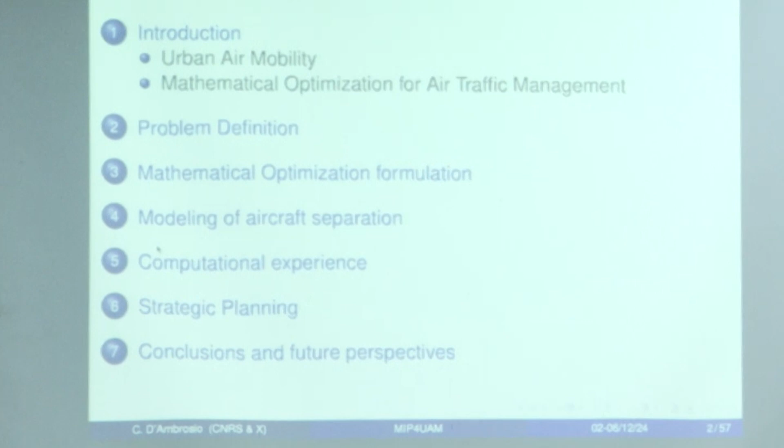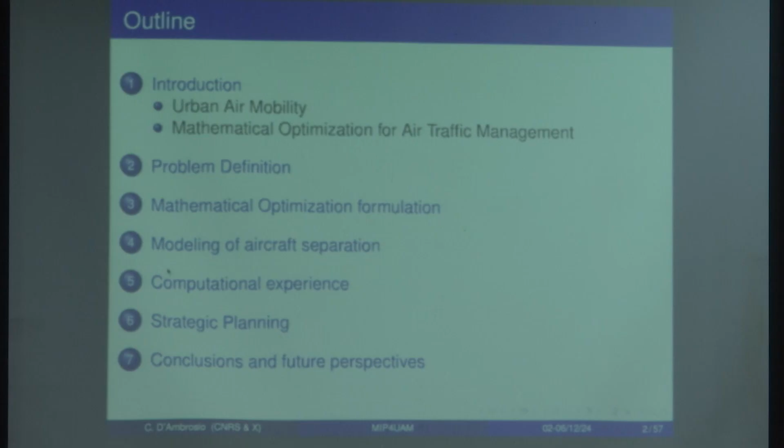So the outline of the talk today is this one. I will start by introducing urban air mobility and what I mean with this. Then I will speak about how mathematical optimization can contribute in urban air mobility and guarantee safety in particular. I will focus on this aspect. Then I will go through a more formal definition of the problem, and I will focus on the most interesting part for me of the modeling of the problem, that is the safety constraints and how we decided to model them. Then I will show you some computational experience, and if I have time, I will speak about some ongoing work. So feel free to stop me anytime for questions if something is not clear.

So what is urban air mobility? I guess all of us know that in widespread cities we have a problem of ground traffic, congestion in particular. There have been several approaches to try to tackle it. In particular, urban air mobility is thinking about using the third dimension, the sky, in order to decongest the traffic a little bit. This, of course, is already present in some cities. For example, in São Paulo, there are people who are using helicopters to move around. But the difference is that it will be like an air taxi that will be available in general, and we want it to be sustainable.

So the idea is that there will be this in cities. Here I put New York and Paris. These are the cities in which the discussion for proposing this service is more advanced. They're still working, and they've been doing some test flights for at least one year in Paris and New York. I looked it up about India, and apparently there are discussions in India as well to propose this service, but they are less advanced than in other cities.

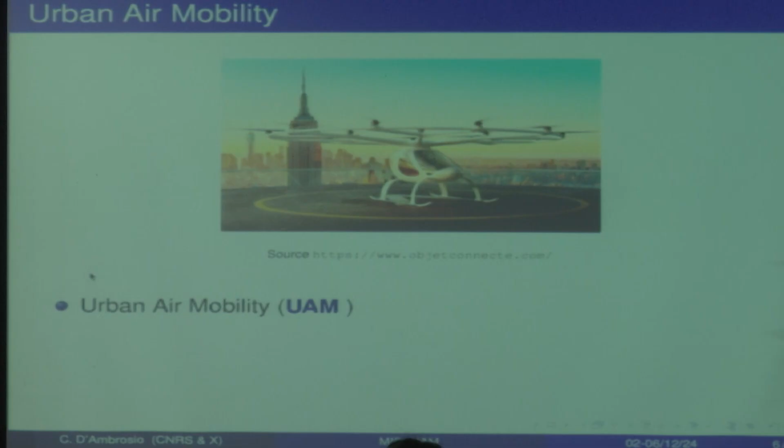So what is the idea, and what is this vehicle here? It looks like a helicopter, but it's not a helicopter. It's called an eVTOL, which stands for Electric Vertical Takeoff and Landing vehicle. It takes off and lands vertically like a helicopter, so the advantage is that it doesn't need a lot of space to take off and land, as opposed to aircraft. It's completely electric, and in the cruise phase it's pretty efficient. There are propellers that are made for takeoff and landing, and others that are for cruising.

The idea is to integrate this service into the public transportation offer as an alternative to taxis. At the beginning, there will be only a few of them, and maybe expensive, but in the long run there will be shared taxis, etc. So the cost will be sustainable, not very far from a taxi, let's say. So that is the idea.

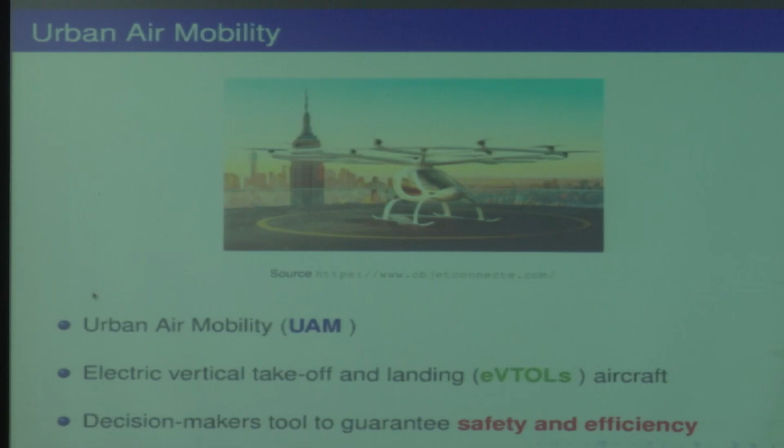However, the point is that we have to integrate it in the system, and there are several questions that are still open. First of all, infrastructure: how to make infrastructure available. You can use heliports, but we will need to install new ones, which we will call vertiports. Also, as they are electric, they have to be connected to the grid and provided electricity, etc. But the focus of today's talk is safety. We need to guarantee that we propose a schedule of these vehicles so that they do not crash, of course. And optimization tools can be used to help this traffic control.

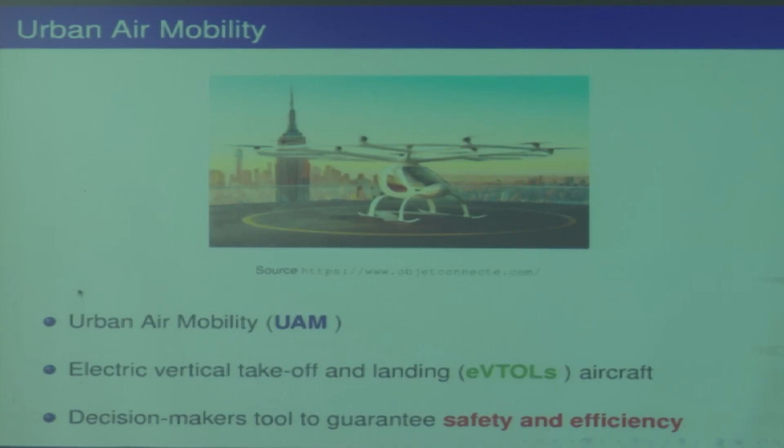So I don't know if you see, but it doesn't matter because I will explain. So there are mainly three phases in air traffic control. This is valid also for civil aviation, actually. The green part is the so-called strategic phase, in which the planning and scheduling of the flights is done in advance. Then there is the second part, in yellow here.

So it's after departure time. It is the tactical deconfliction, where we suppose that some disruption might happen, and then we need to re-optimize in order to make the schedule that became infeasible feasible. And then there is the red part, detect and avoid, where the pilot decides. So we're really about to crash, and they need to decide what to do.

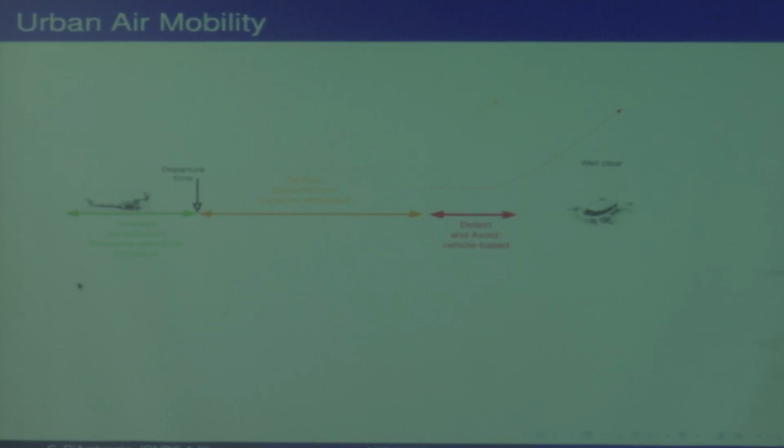We need to try to fix the situation before we arrive at the red part, because in the red part mathematical optimization cannot do anything anymore. So we will focus on the first two parts. In particular, I will actually start with the tactical deconfliction. We have a conference paper on this part, and this is the ongoing work. This other paper is more on the re-optimization part, the tactical deconfliction. I will start with this because we use this problem as a sub-problem of this one.

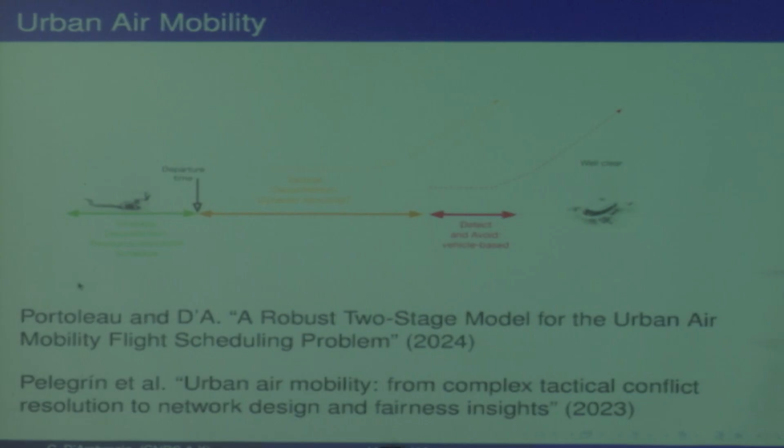And the idea for the strategic deconfliction will be to have a robust solution, which is robust to the disruption that we will see here. Okay, so far so good? Yeah.

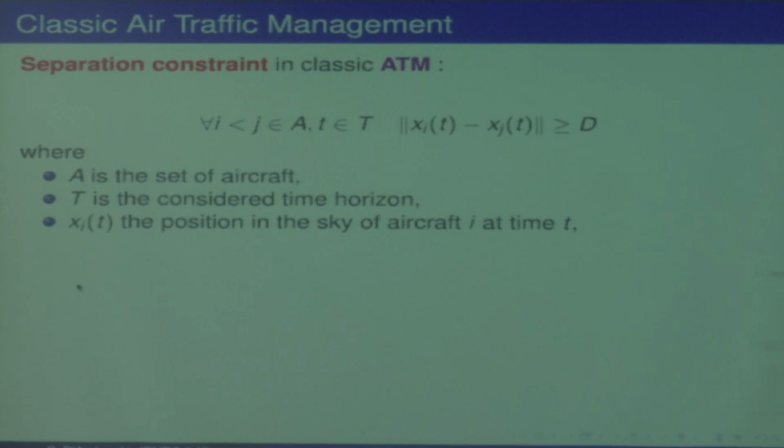Okay, so now mathematical optimization. Let's start with some formulas. I will start with what we ideally would like to have, which is guaranteeing safety, given by these constraints. Capital A is the set of aircraft. So for each pair of aircraft, and for each instant in the time horizon, capital T, x_i(t) is the position in the sky of aircraft i at time t, and we would like the distance between i and j to be at least capital D,

that is our safety distance. Unfortunately, this constraint has several aspects that make it complicated. First of all, this is usually a Euclidean distance, so it's a nonlinear, non-convex constraint. Second, t cannot be sampled and discretized; we need to consider every instant in order to guarantee safety. So we have non-convex constraints, actually an infinite amount of them. We don't want such a difficult problem in the re-optimization phase, so we will see how to specialize and simplify this constraint in the urban air mobility situation.

Infinite amount of them, because of what? T. Yeah. And unfortunately, if you discretize, you don't know how to discretize it, because between two samples there might be an infeasibility, right?

Okay, so what is the idea? I have flight 1 in red and flight 2 in blue. At time 0, they are in this position. They need to take off, and their trajectories are fixed, this and this. If they take off at the same time with the same speed, they will find themselves in the same position at time 5, and of course there will be a crash. So we want to avoid this.

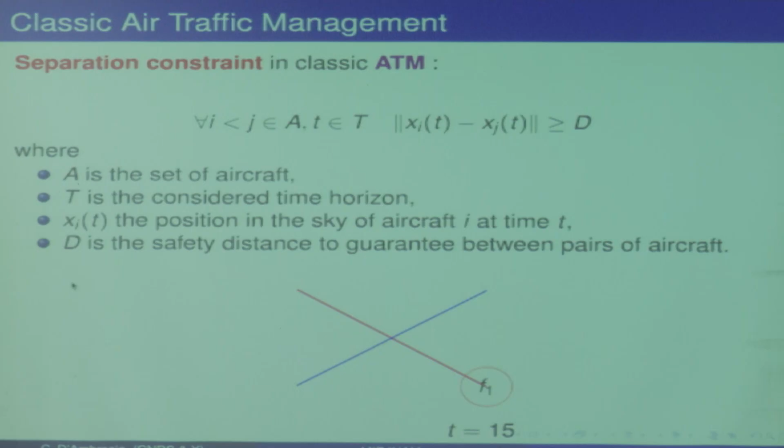So what could be a potential solution? We ask F2 to leave at 0, but F1 to wait, so that when F2 is here, F1 can go here safely. And then F1 will just arrive a little bit later to the destination. Okay? Clear? Yeah, okay.

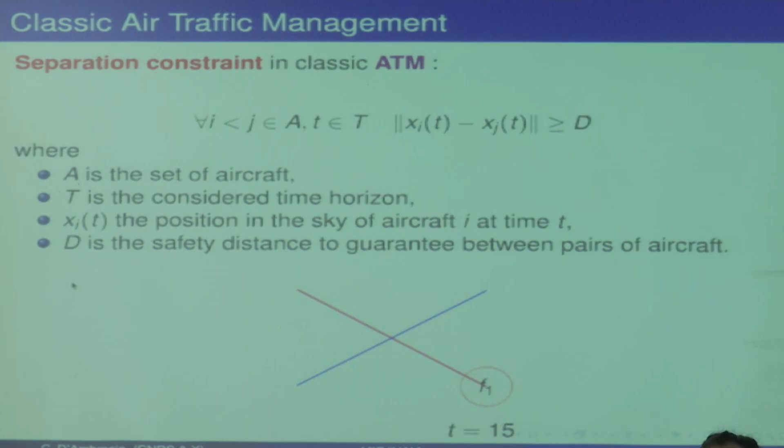What about vertical separation? Oh, vertical separation, that is a good point. Even in classic air traffic management, you consider only the flights flying at the same altitude. So you can consider a 2D problem, and you do not want them to change altitude during the cruise.

But shouldn't the assigning of altitudes be done at the same time? Say again? Shouldn't you be choosing the altitude and the departure time simultaneously? That can be done. So basically, the decision on the altitude is made at takeoff; takeoff is the only place in which you change altitude. And in our modeling, we can deal with it by splitting the different corridors and assigning them to different aircraft. Does it answer it? Yeah.

So this is how it will work in the US. There will be a corridor, so some given altitudes that are devoted to this service. And they define some kind of roads in the sky, virtual roads in the sky, and the vehicles cannot really get out of it. So they cannot change altitude in the cruise phase, and they just have to follow the road, and that's it. So that is how it's organized.

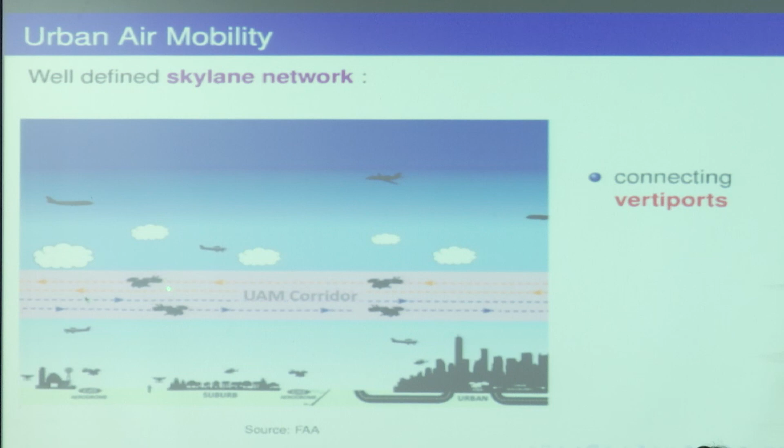And so basically, for each of the roads, there is a direction, and they have to keep it. They cannot overtake each other. So it's very regulated. And so the idea is that we want to decide... I mean, actually, our only decision is really the scheduling of the flights, because they cannot change path online, basically.

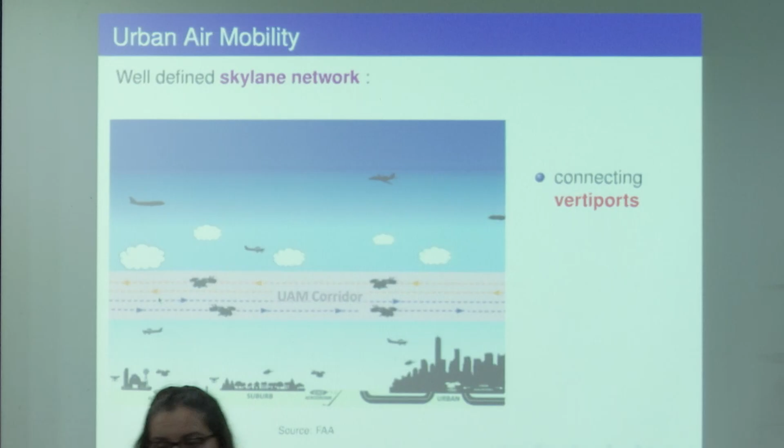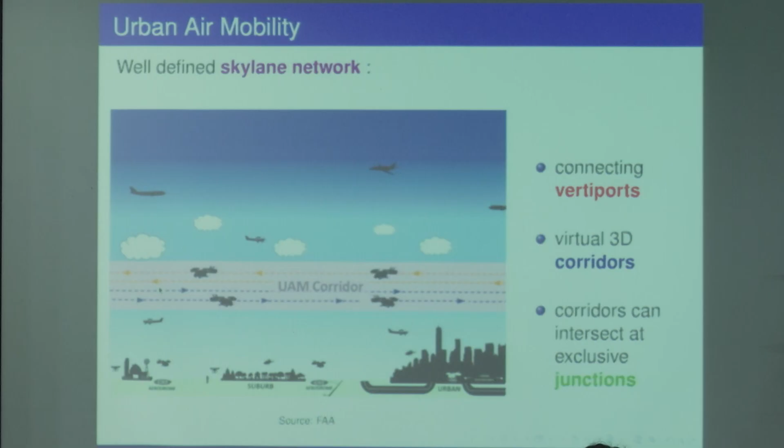And so the safe scheduling for F2 was: we leave from X2 at 0, then we arrive at X3 at 5, and we arrive at X5 at 10. And for F1, we leave X1 at 5, we arrive at X3 at 10, and we arrive at X4 at 15. And so finally, our constraint that will allow safety is that we need F1 to arrive at this common point after the time at which F2 arrived at this point, plus a kind of safety time that I will define more formally later. Okay, is the problem clear? Okay.

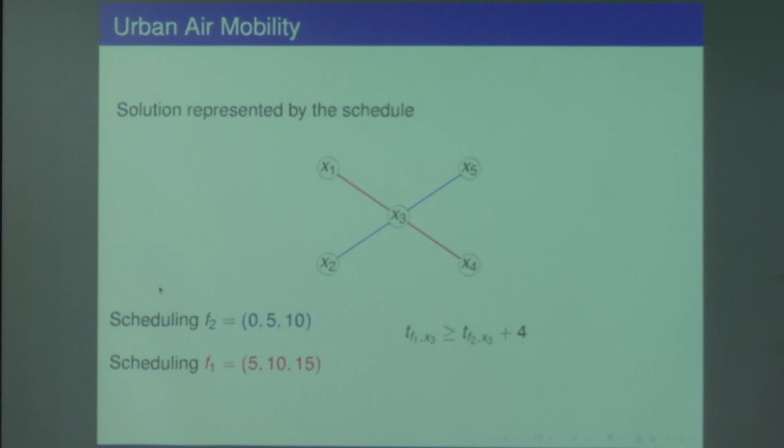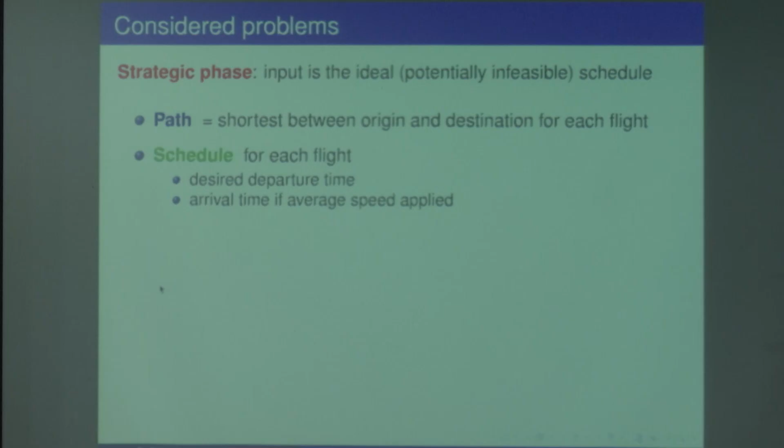However, we will focus on the tactical phase, in which we have a nominal planning which is not feasible anymore because of some disruption. And we decided to consider three types of disruptions. One is just a delay. The second one is we need to accommodate a new flight that wasn't planned. So suppose that we have a hospital that has to transport some patient, or a police or whatever priority flight we have to accommodate. So we try to give priority to this flight and adapt the schedule to this priority.

And then third is unexpected traffic, which can be an intruder that wants to make some problem in the sky. So the first one can be kind of predicted, and the other two are more unpredictable scenarios. And the third one is even more complicated because in the second case, for the priority flights, it's a collaborative situation. In the third one, no.

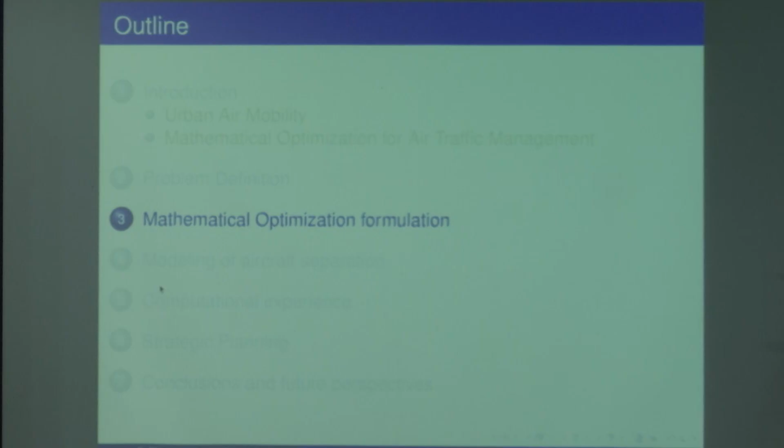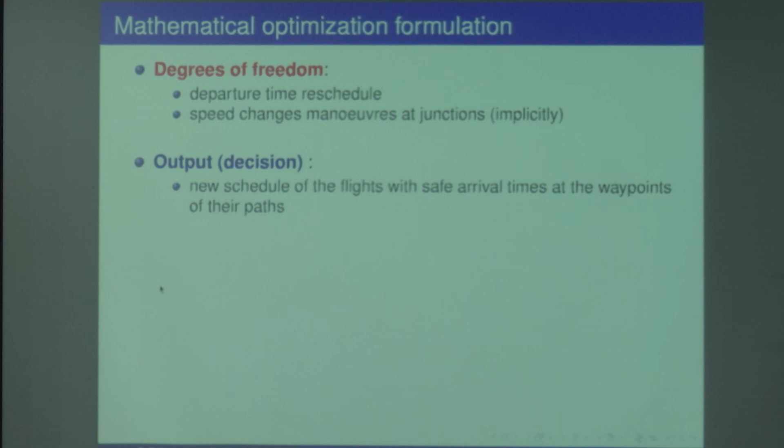Okay, so let's speak about the mathematical optimization formulation. As I said, the degrees of freedom are: we can let the flight wait for the departure, so change the departure time. And we can also, at each of the junctions, decide to change the speed. So we can change the schedule all along the path of each of the flights. We cannot change the path for the moment. And the output is the new schedule, which is feasible with respect to the disruption that we had. Yes? So this means that the disruption can be before the takeoff, or during?

Yes. So there will be some flights that are already flying while the disruption is coming, and some flights are not flying. That's a good point. So the departure reschedule is just for the flights that didn't start yet. Actually, for the computational results, we consider some batches of flights. Some of them have to start now, some of them in 5 minutes, etc. So based on when they are supposed to leave, we can or cannot reschedule based on the disruption.

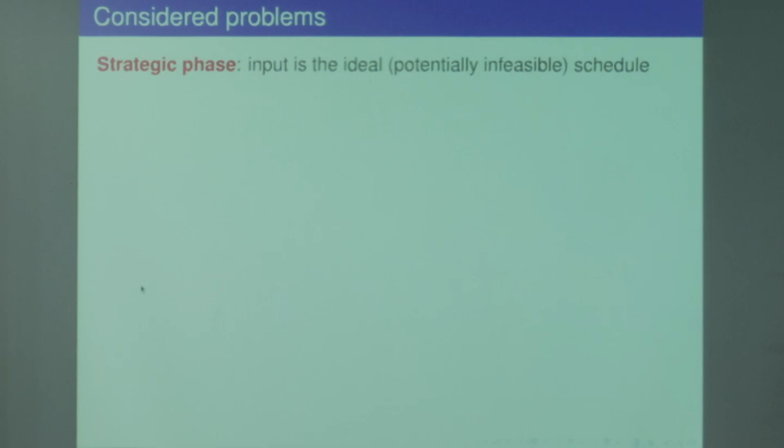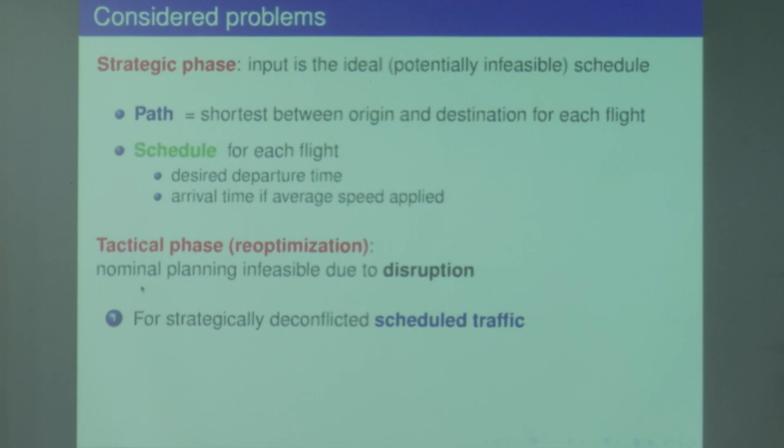Other questions? Yes. Can they wait in the air? No. We cannot wait in the air. So that's also a good question. Actually, we have a nominal speed, and we can change it only by plus or minus 5%. So it's a very controlled modification. And the reason is because we want the passengers to feel safe and not to feel the changes. And this is also happening in classic aviation. In the re-optimization that I'm doing, it's between 5 and 10%.

We will see how it changes in the computational results. And then there is the red phase, in which whatever is allowed. So you can speed, you can change route, etc., just to avoid the crash. But that is really the last-minute recourse, and the pilot is responsible for that. So these are very, very tiny modifications to the schedule, but we will see that typically they help recovering a feasible solution, at least in the first two scenarios. Other questions?

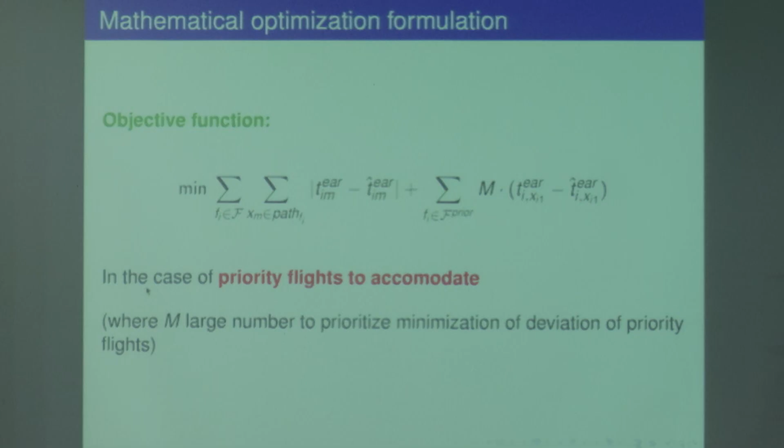Okay, so let's now focus on the safety constraint that I showed you before, which is very ugly and complicated. Let us consider that we want to solve this problem in a few minutes, not more, because it's an operational problem and we have to react very fast. So we do not have among our variables the position of the flight, but we have their position indirectly because of the schedule. So we can write the separation constraint as this.

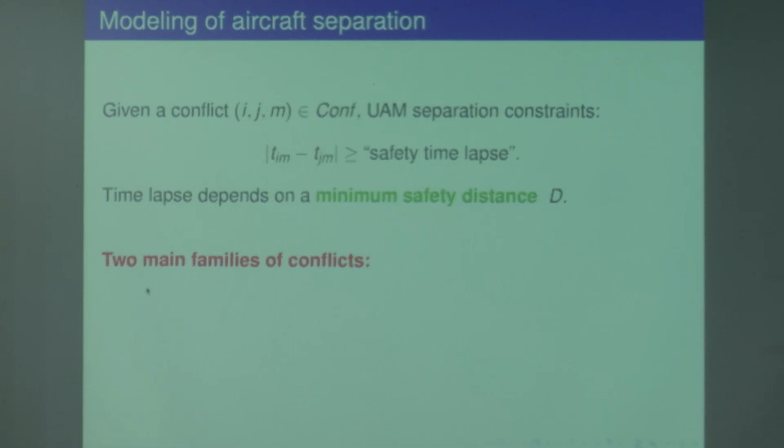The time at which flight I passes through node M minus the time at which flight J passes through node M has to be greater than or equal to a safety time. And we will compute this based on the safety distance. In particular, we will consider two families of conflict: trailing and intersection. Trailing is easy because it's the situation in which both flights take the same arc.

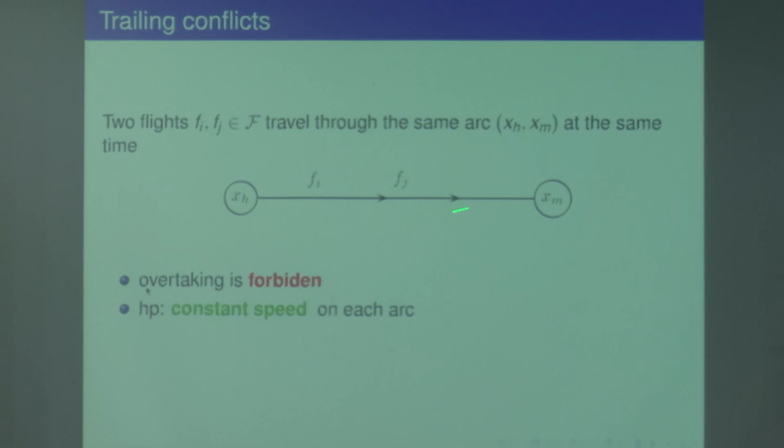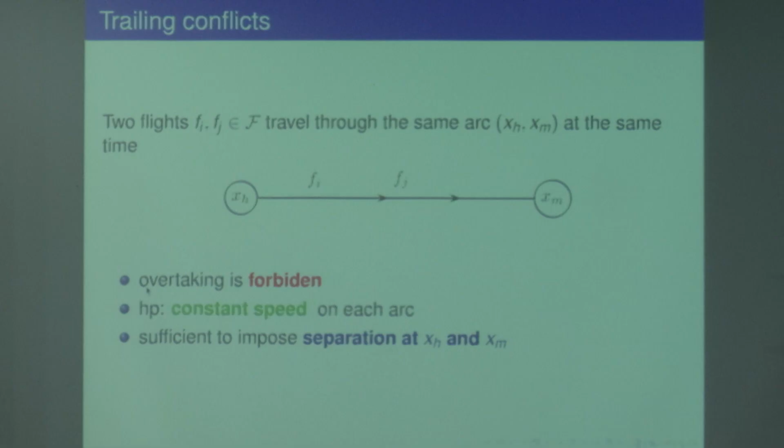In this situation, suppose that overtaking is forbidden, so whoever enters the arc first will exit the arc first. And as a hypothesis, along the arc the flight has a constant speed. So it's sufficient to consider the beginning and the end of the arc to impose the safety condition. So at least we have a limited number of constraints. How do we write them?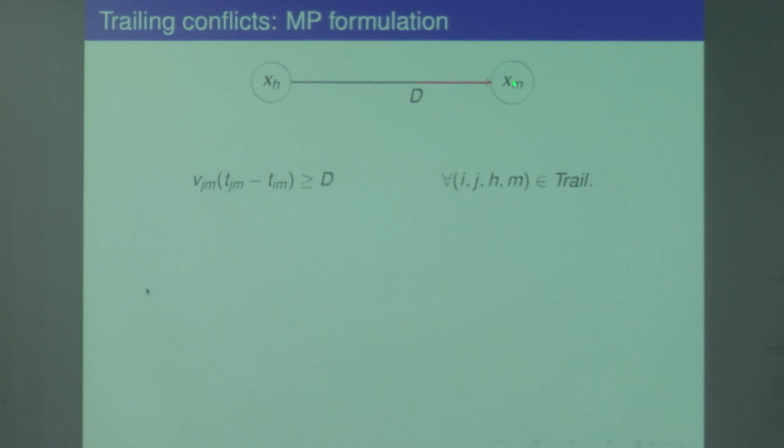Then we have a similar situation at the end of the arc, because the left-hand side represents the distance that the flight j that is coming later should fly before coming at xm when I is at xm. So actually when I is here, we want the flight to be at least here.

And so similarly, we simplify the constraint and consider the lower bound. So we have a more conservative constraint, but we want to guarantee safety. So it's simpler to solve and also more safe, if we can say. And so we will use this. Is the trailing conflict clear? So the velocity is constant. In this case, I just use the lower bound.

So this is why. Basically, I could have been less conservative if I used the real speed, but it would give us a nonlinear constraint, and we do not expect to solve this nonlinear problem in a few minutes. So this is why I say it's more conservative, because I use the lower bound on the speed in order to impose the safety constraint, while I could have just used the speed itself.

Okay, then there are three other kinds of conflicts. The conflicts in which the flights are not using the same arc, but they are converging to the same node. Then the case in which one flight is leaving the node and the other is entering the node. And vice versa, I have the case in which two flights are diverging from the same node. I have to take care of this as well.

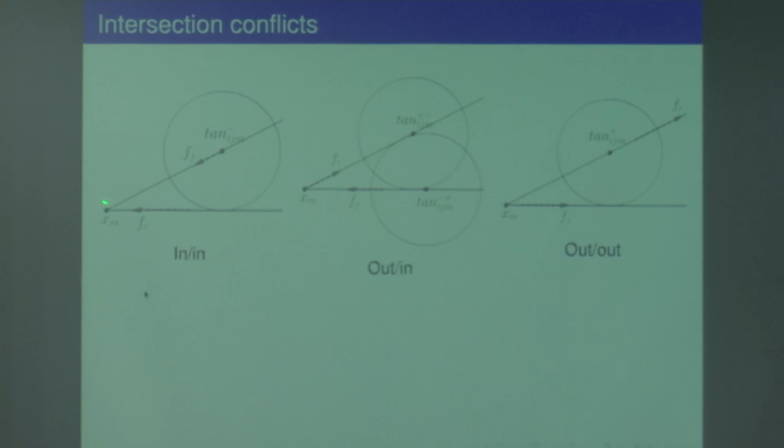So what we are going to say is that flight J is allowed to be here when flight I is already here, not before. We have a similar situation in the other three, but just to make explicit the constraint: TIM, the time at which I is here, has to be less than or equal to the time at which J is in this position here.

And we can write it similarly to the previous constraint. We just need an extra coefficient to take into account the angle between the two arcs, and that's it. And similarly for the others. So everything is linear.

And now, let's go to further modeling details. So up to now, I supposed that we have an order in which the flights have to pass, but actually we also allow them to exchange. And so we will actually have these disjunctions saying either I passes before J, and then we need to impose these constraints, or J passes before, and so we need to impose this constraint. So now I think you're convinced that it's a mixed integer linear problem.

And yeah, the bound speed, I already spoke about this, and then we have some technical constraints about climbing arcs that I was mentioning before, etc. But they are, let's say, more classic constraints that can be easily written as linear, so I will not detail them. I have the full model if you want, but it's very long, so less interesting. So I will just have a look at the time. Now let's go to some computational experience.

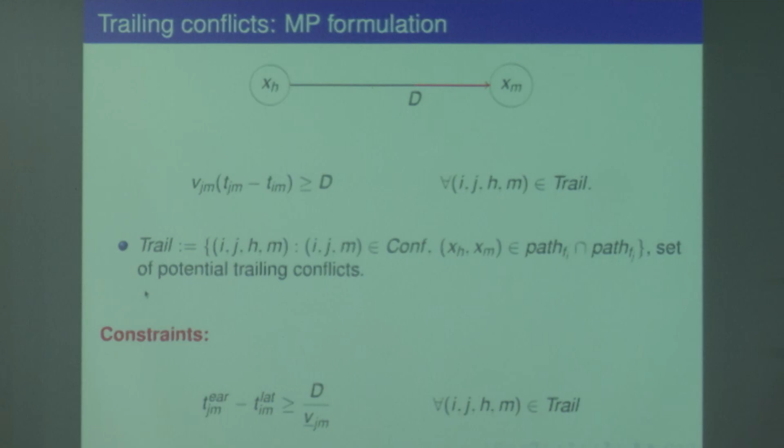Here we just impose the constraint on this node. So we ensure that this flight will not go into the trajectory of the other flight before it can reach. So this is clear, but then later on, the next step can be any of the other cases. So we treat them separately, but they will all be present in our constraints. So after this, you can have a situation in which you have diverting or splitting, etc. So they will all be covered by these three cases.

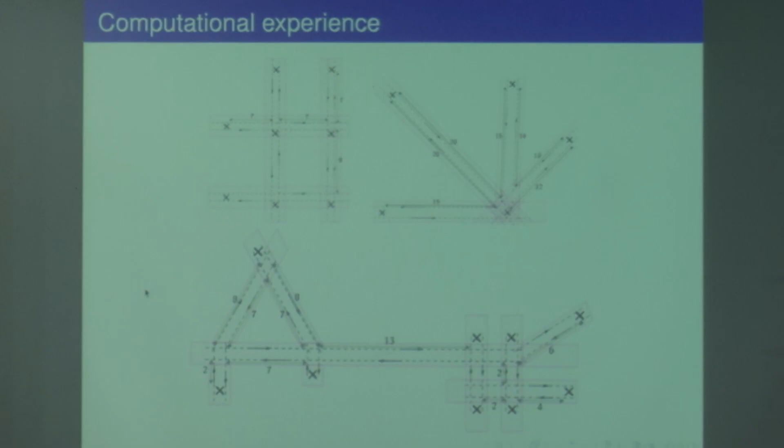Okay, some computational results. So we consider three topologies. These are kind of schematic topologies, but you can see that the X's here are the vertiports. Of course the service doesn't exist yet, so these are realistic instances, let's say. Realistic because our colleagues from Uber provided these topologies that for them are realistic. And then we generated some instances. As I said, we consider 3 scenarios, and for each topology and each scenario we consider 20 instances, generating them by batches of flights that were regularly planned to leave from each of the vertiports and arrive at other ones.

And then for scenario 3, the intruder one, we had 180 instances because for each topology and each 20 instances, we had 3 different values of R, which is how much time we have to react before the intruder actually enters the corridor. And this is, of course, decreasing complexity. So the more time we have to react, the more likely it will be that we can find a feasible solution or a rescheduling.

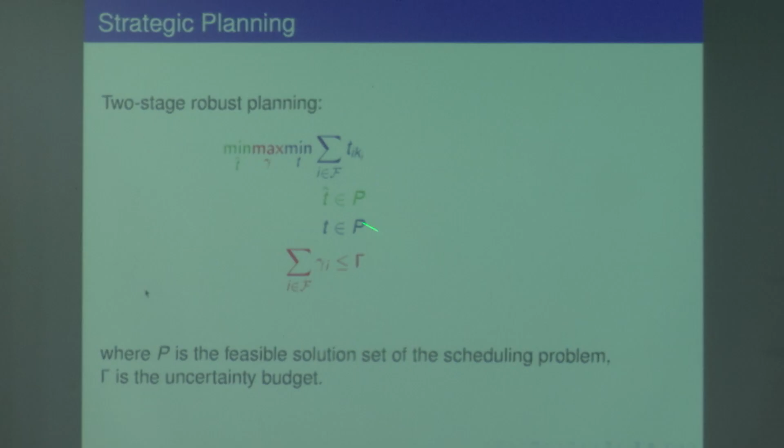So P represents just the feasible solution set of the scheduling problem that we have seen before. And then we want to find the gamma values, which represent our uncertainty set, the worst case uncertainty that we can find. And then minimize over the re-optimized schedule. So we have here T hat, that is the nominal schedule. T in blue here is the re-optimized schedule. And then we have some constraints about the uncertainty set.

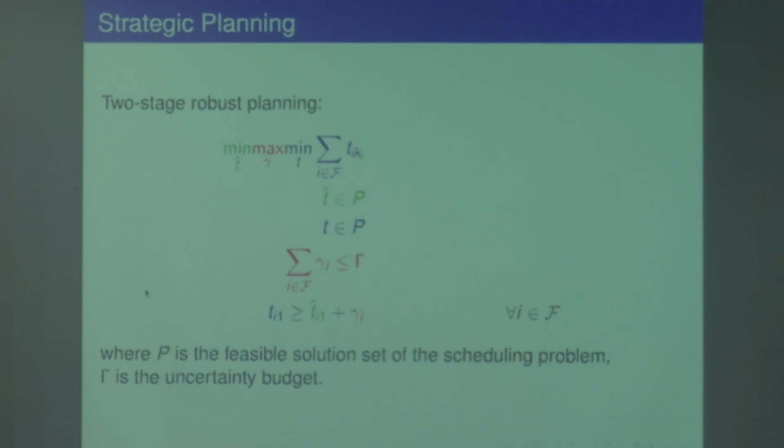We have a budget value, capital gamma. This is the uncertainty budget. And then we can spread it, these are variables, along all the flights. And this will influence only the departure time of the flights. And so the new schedule has to be greater or equal than the planned schedule plus the uncertainty, so the delay that we impose to the flight. Is this clear? Okay.

So now, what did we do? We applied a kind of adversarial Benders decomposition to this. The outer problem is a mixed integer linear problem, but I want to focus on the inner problem, which is a max-min problem. So what we tried so far were these approaches. First of all, to solve the sub-problem here, recall that if we didn't have any binary variables, we could reformulate it, dualize it, and make it just a unique problem. But we actually have binary variables, so we cannot do it.

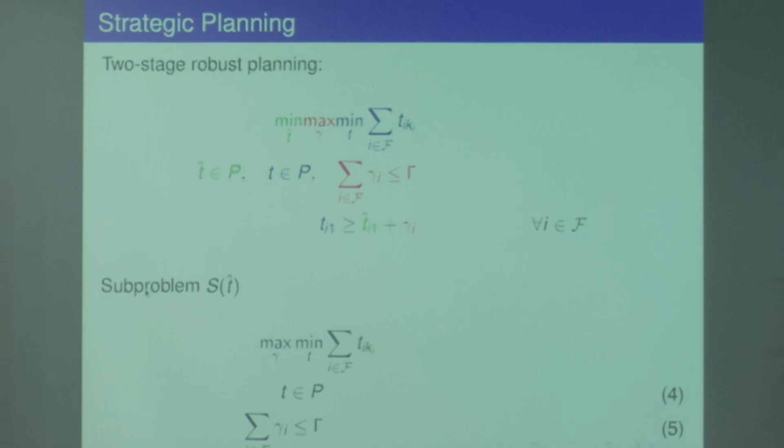So we decided to explore a local search algorithm, based on the fact that we can prove there is an optimal solution of the worst case uncertainty scenario with the budget inequality tight, so we have an equation valid here. So we explore the neighborhood given by the fact that the sum of the gammas has to be equal to capital gamma, so we use all the budget, and then we explore a neighborhood of the current solution. The current solution is gamma here, and gamma prime is the alternative solution that we want to find. Once we fix the values of little gamma, the other problem we know how to solve, because it's just the tactical problem that we solved so far.

Then the alternative is, okay, so let's see what happens with the dualization. So the binary variables allowed us to model the disjunctions that said, well, you can change the order in which the flights are passing through a node. Now, let's see what happens if we keep the same order. And so at this point, we do not need disjunctions anymore, and so we can dualize it. And we have either a quadratic program, or we had actually this situation in which we could compute a recursive formula for computing the delay of each of the flights.

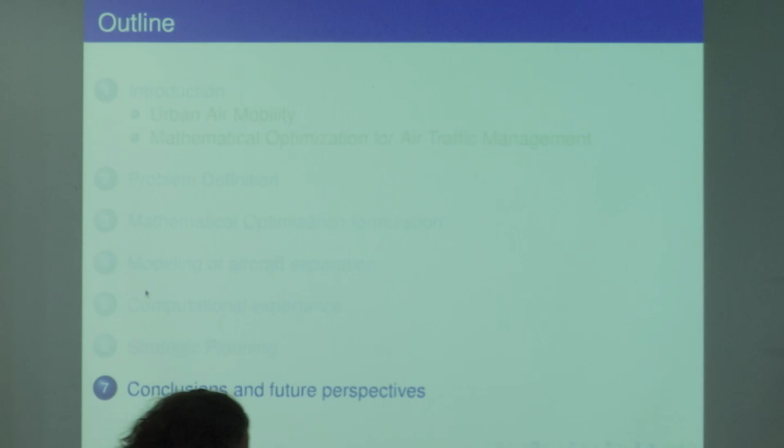we have some computation about the strategic planning, comparing the local search, the quadratic version, and the other version is a mixed integer linear program. Actually, I thought I had a slide on the model that is resulting from this, but exploiting this recursive formula we can write the subproblem as a mixed integer linear program that we solve. It's an exact one. And then, yeah, with some results.

So here we have, for each of the topologies that we've shown before, and for different values of uncertainty sets, we have 10 or 20 uncertainty sets. We have the average, the time, and the number of iterations. So basically, you can see that the time here is larger for the local search, maybe because the search is not done. It's a larger problem, of course, because we are also allowing the changes of the order of the flights. So here we have similar results for the quadratization and for the MIP, for the subproblems.

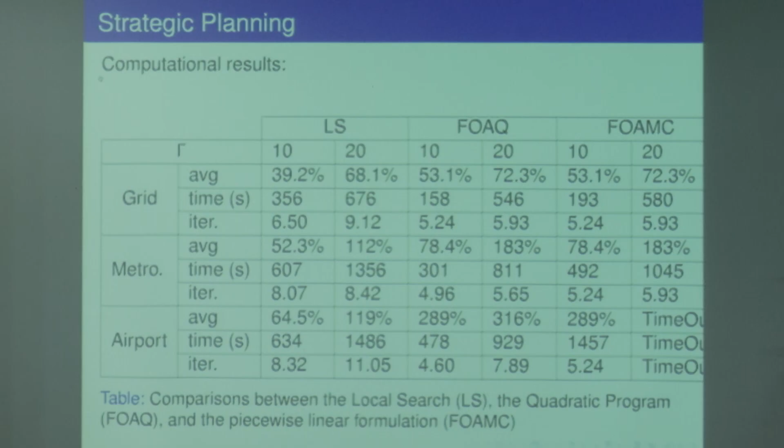But then as we change the topology, they also change. So it looks like finally the quadratization, from what concerns the time, is the best. Of course, we are limiting ourselves to a case in which we do not change the order. So we think that it's less likely that we will find more solutions because we are restricting our problem. And so it's also interesting to solve with the local search for this reason.

And then I would like to speak briefly about what we are doing now, which is trying to have other alternatives to make more instances feasible. In particular, one of the things that I told you at the beginning is that we do not allow changes of the path. But now, what if we do not have any choice? So we have an infeasible problem if we allow only speed changes and departure changes. And so we allow only in that case some path changes.